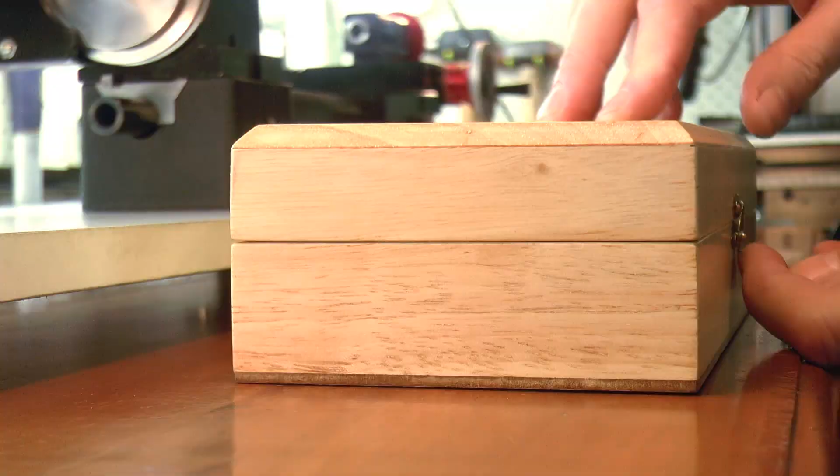A number of requests over the last few years have centred around how to go about setting up a home machine shop. What are the essential tools to buy and in what order should they be purchased? Well, it's a very big subject and I think it's fair to say that everyone is going to approach this differently. So take what I'm about to say as a sort of rough guide, but don't hesitate for a second to adapt it to suit your own situation.

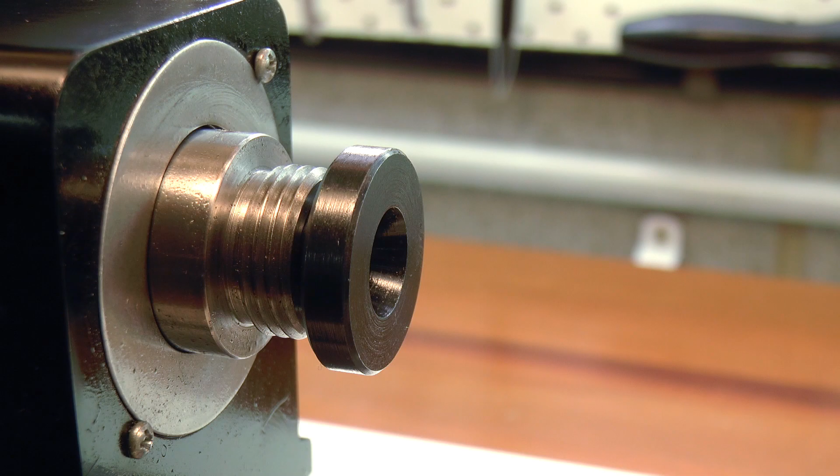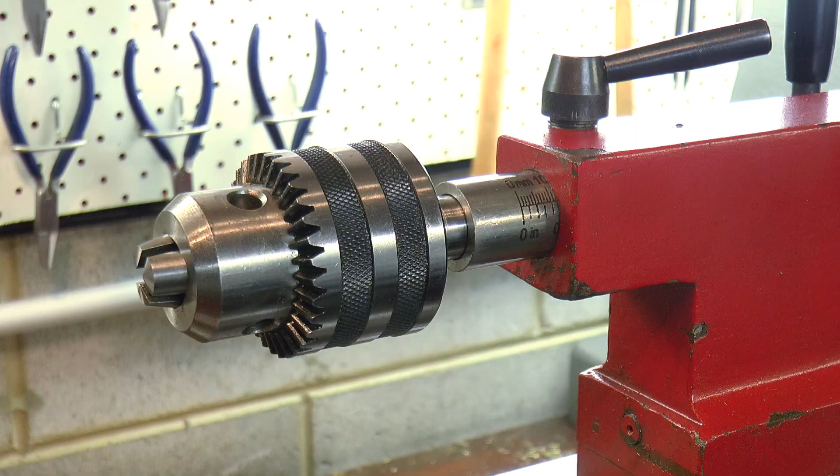Okay, so before we start, here's a quick overview of my shop. I have 4 basic machine tools that I consider to be the core of the shop. That's the lathe, the mill, the horizontal bandsaw and the bench grinder. Now there are a number of accessories required to make both the lathe and the mill usable. And there's a small amount of essential metrology and marking out gear required, stuff that every shop needs to have as a bare minimum.

There's a collection of what I'd broadly describe as the essential hand tools. And finally, something I don't often mention is the library of magazines and books that I've built up, which I also consider to be an essential part of the shop. Now on the periphery of this shop core are all of the nice to have tools that without a doubt make life in the shop not only easier, but also a lot more fun. For now though, I'm excluding those tools and keeping the discussion to just the essentials.

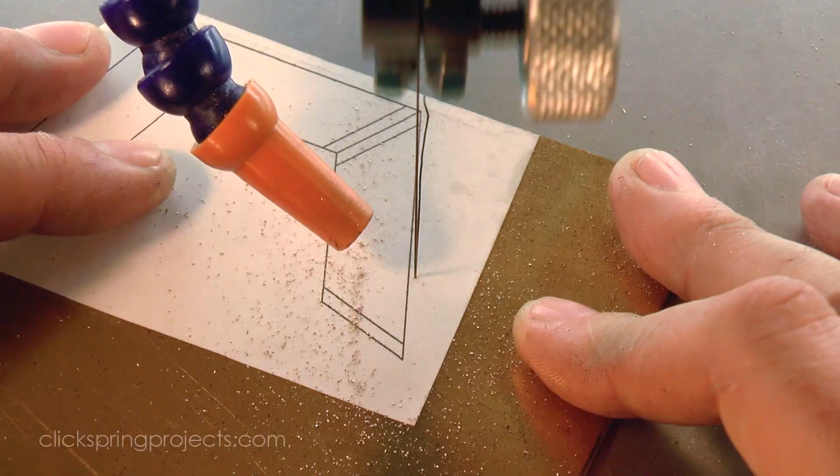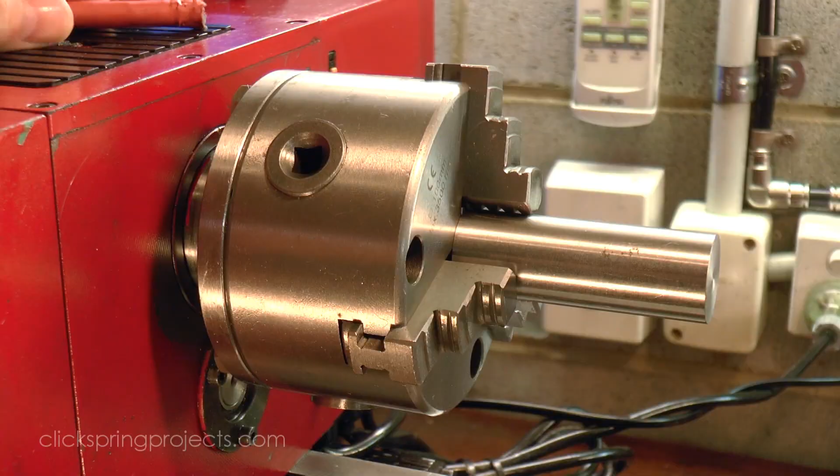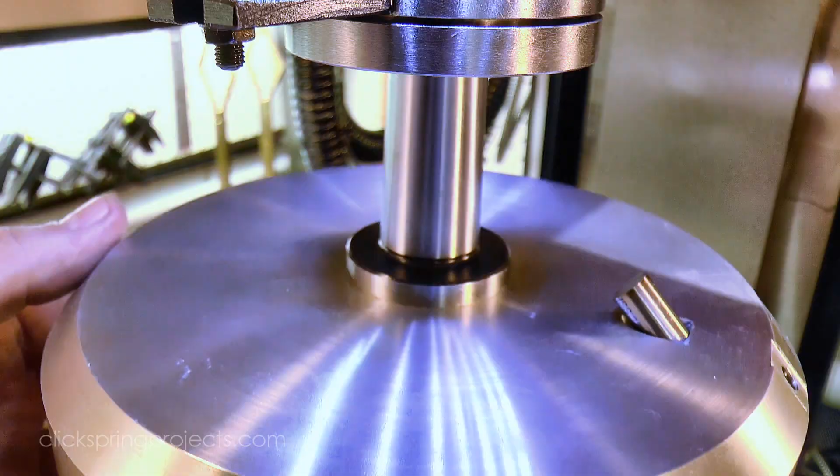The other tools are certainly worth considering at some point, but they can definitely wait until you've locked down the rest. Because the strategy I recommend is to start small and then build the shop in discrete stages. Get the key machine tools and the bare minimum accessories to be productive, and then slowly accumulate the rest of the shop over time in response to the projects that you take on. So in effect, the projects themselves become the driver behind future tool purchases. And importantly, also the driver for the tools that you choose to make for yourself.

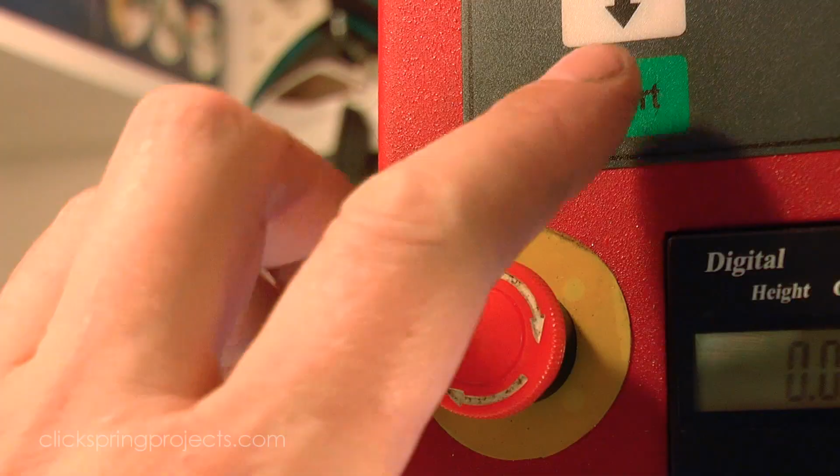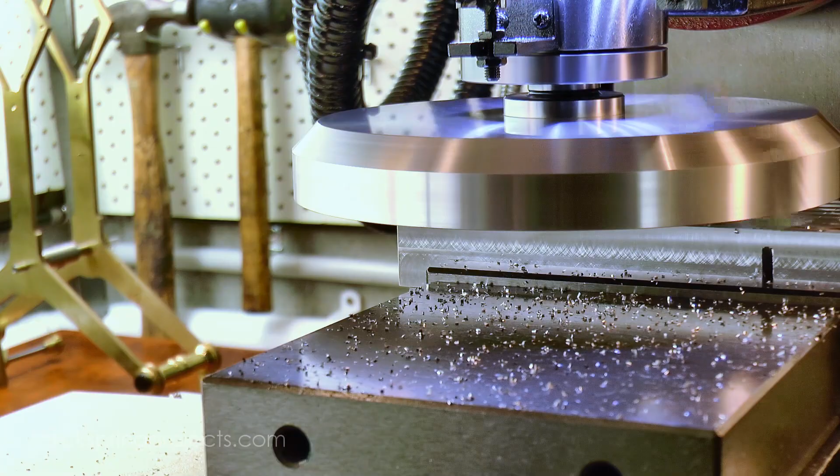Because as the shop develops and grows, you'll become increasingly independent of the tool retailers and further able to bootstrap the shop development using what you already have. You can make something like, for example, this large fly cutter that exactly suits your needs that simply isn't available for purchase anywhere else. That tool gets used along with everything else to make more tools, and on it goes until you've got the shop equipped exactly the way that you want it.

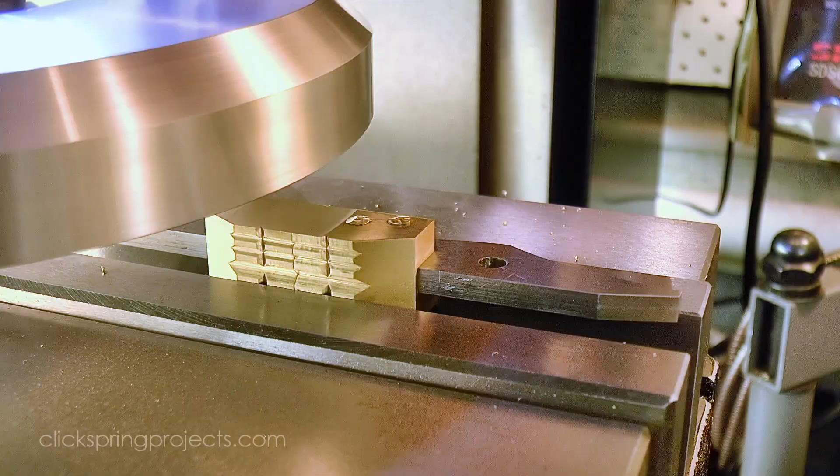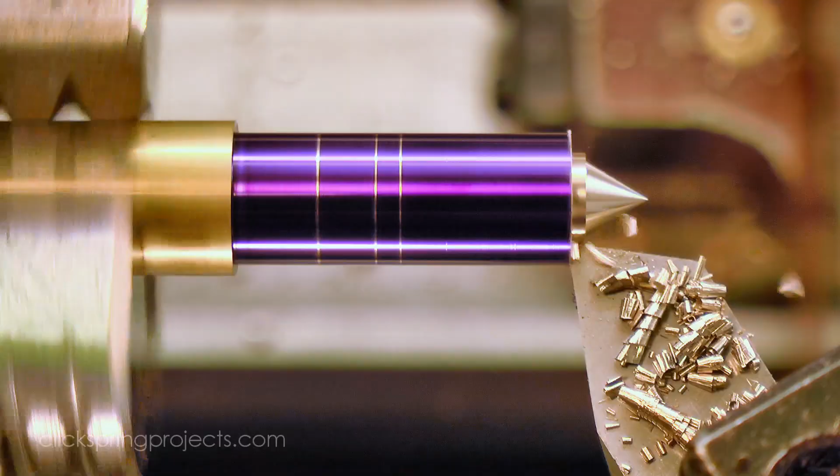Okay, so where's a good place to start? Well, no matter what you choose to make in a shop, a large proportion of your time is going to be spent making parts with turned features. So unless you've got a really good reason to go with a mill first, a lathe is almost certainly going to be the logical first purchase. Now, which lathe in particular is itself a huge topic, and I'm going to cover that in detail in the next TGT. But no matter which lathe you decide on, you'll need at least a few extras before you can start to get the very best out of it.

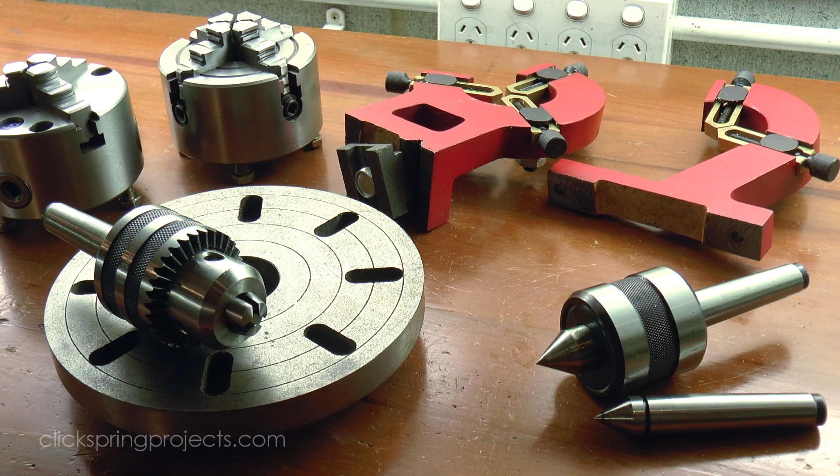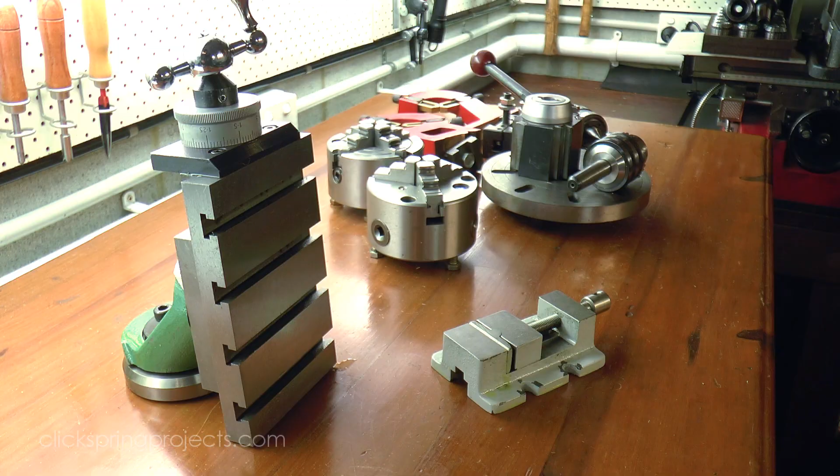Most lathes come with a 3 and 4 jaw chuck, a follow and steady rest and a faceplate. But you'll also want to immediately consider a drill chuck, a live and dead centre and a quick change tool post. If a mill is still outside the budget for the foreseeable future, then maybe also consider a vertical slide and vise so that you can take care of some of the small milling jobs on the lathe cross slide. And of course, you'll also need some lathe tools.

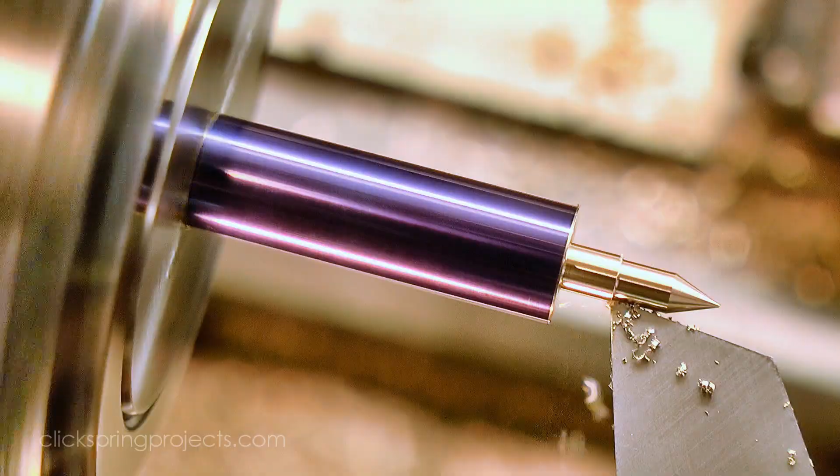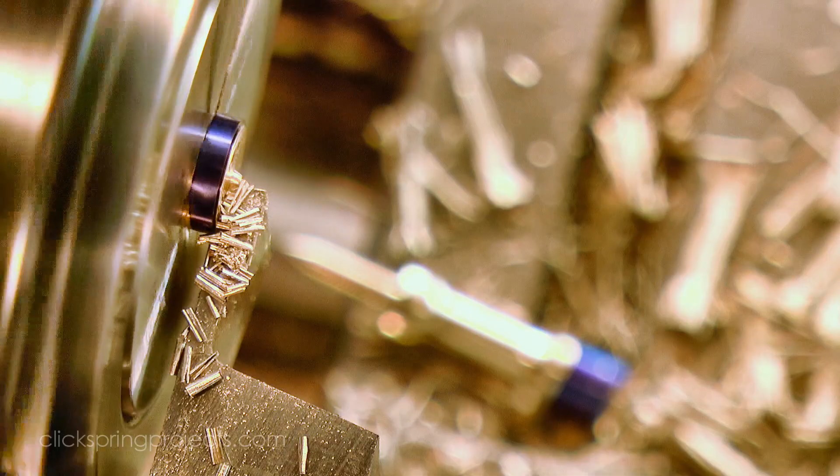Now, as you've probably noticed, I use high-speed steel and shop-hardened carbon steel almost exclusively for my lathe tools. I do use insert tooling from time to time when I really need it, but by and large I find high-speed steel and carbon steel to be more versatile. I can fully customise the tool to any required shape, and I find it better suited to the scale of work that I do. But of course that means the shop needs tool number 2, a bench grinder. Generally, they're not overly expensive and usually come with a fine and coarse wheel already installed.

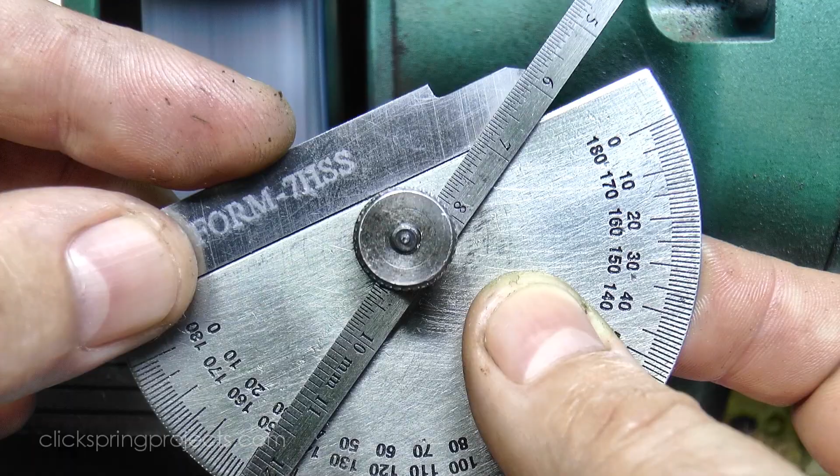The high-speed steel blanks can be bought from most tool suppliers, and there's a number of excellent videos on YouTube showing how to freehand grind lathe tools.

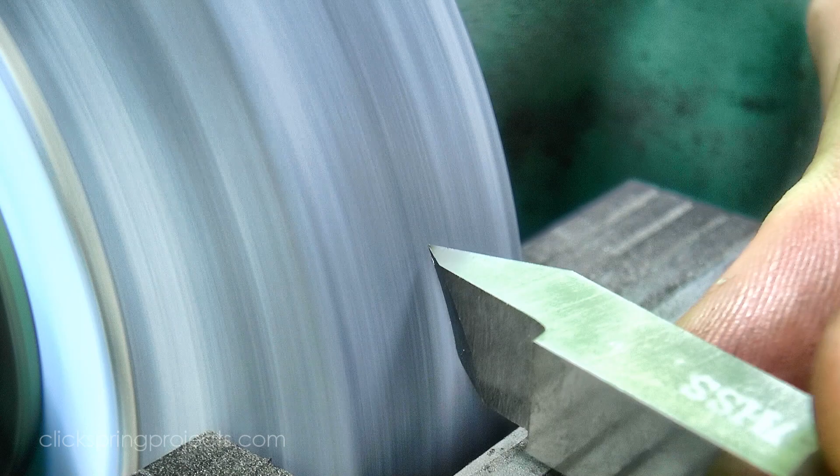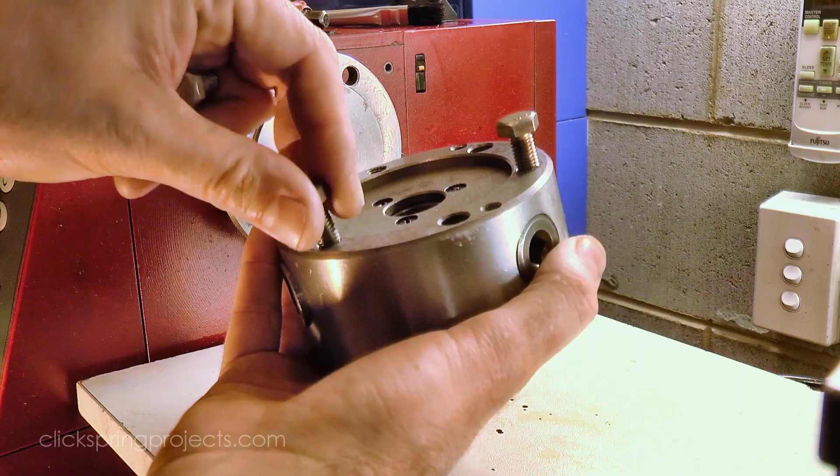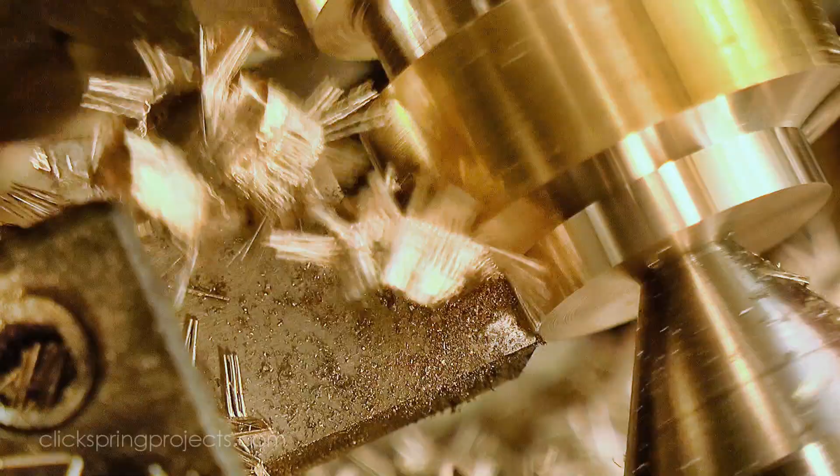One thing this tool requires though is a second isolated area away from the main shop to ensure that the grinding dust doesn't drift onto the lathe bed. Now, it doesn't need to be anywhere special, just so long as it's not inside the actual shop. Okay, so at this point you're off and running and you've got your own machine shop. And if you've hit the budget limit, then the shop can stay at this first stage indefinitely, without issue. You can start making some of the tools that you'll need, like drawbars, chuck keys and so on, have some fun and slowly accumulate some more of the accessories over time.

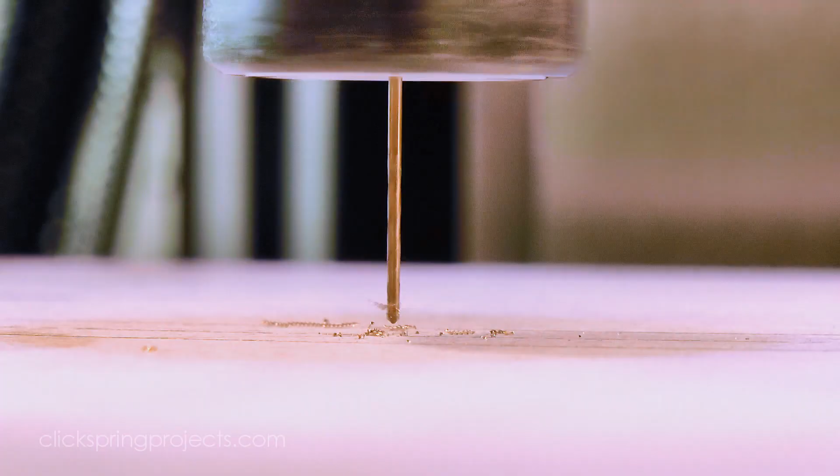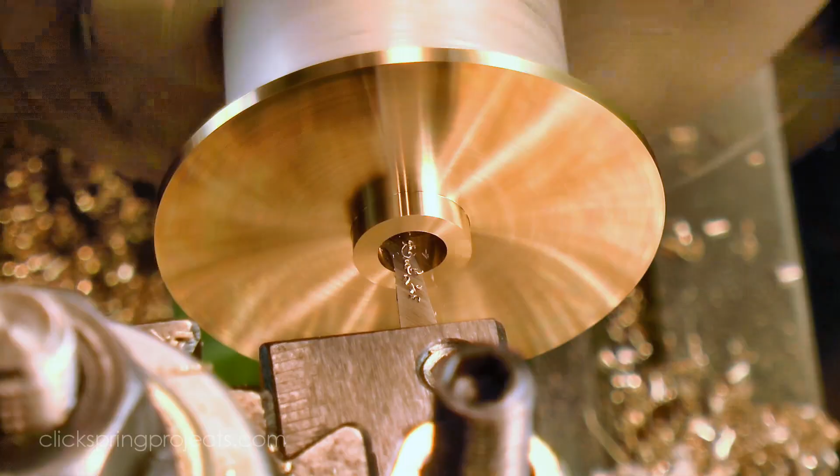But one interesting thing about machining is that while a lot of time is spent forming profiles, it's also largely about making holes, and lots of them. Some small, some large, some tapped, and almost all of them required to be exactly where you need them to be. Now, to some extent, these holes can be formed on a lathe, but when the budget permits, eventually you're going to want to think about getting either a drill press or, I think, the better option of one of the benchtop mill drills.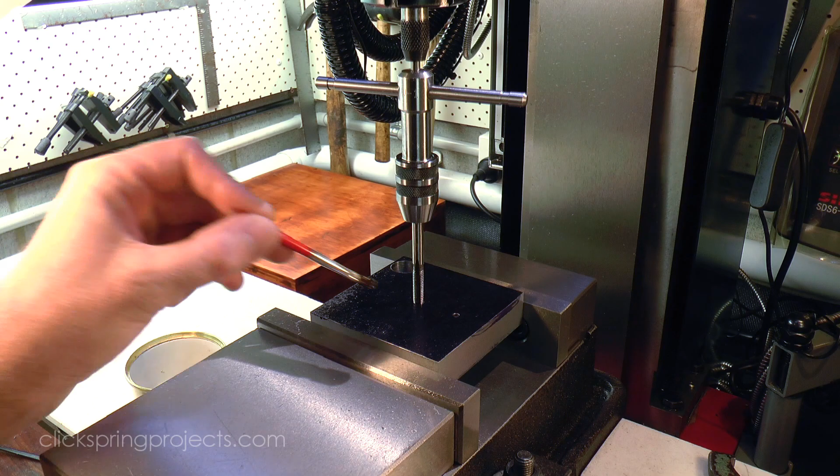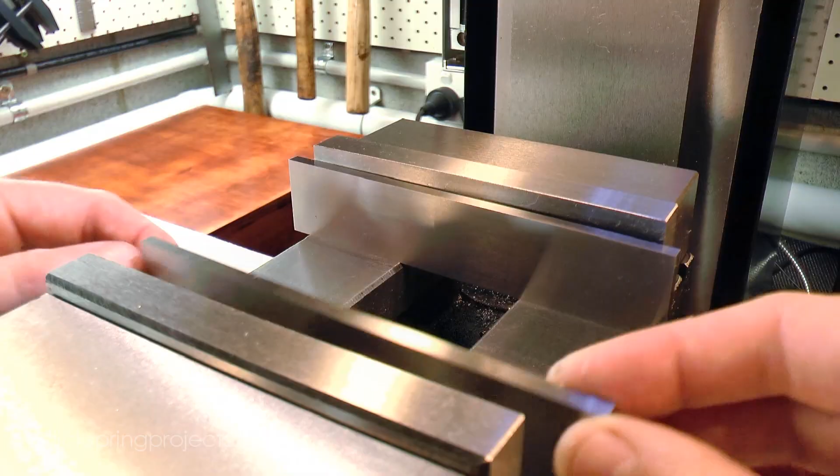Now again, selecting one is a big subject, and I'll cover it in detail in a separate video. But much like a lathe, no matter which one you choose, there's a couple of extra bits and pieces you'll need to consider to make it useful. The machines tend to come with a basic clamping kit and a drill chuck. But you'll immediately want to consider a decent vise, some parallels, an edge finder and wiggler, and some way to securely hold the cutting tools.

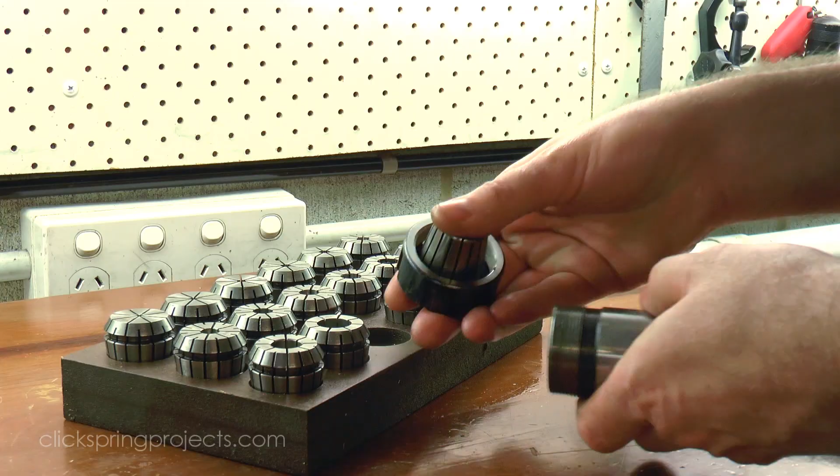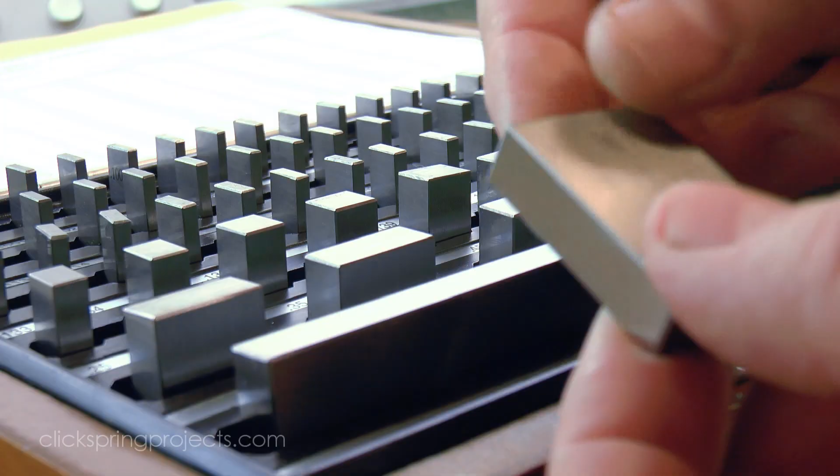I use ER32 collets in a collet chuck, and I selected a number 3 Morse taper for both my mill and the lathe spindles, so that the collet chuck would be interchangeable between both machines. That way I could use the one set of collets across the shop. Now things like gauge blocks, sine bars and the various setup blocks are all nice to have, but don't hurry to get those just yet, they're not that urgent. Wait for them to come up on special or second hand and get a better deal.

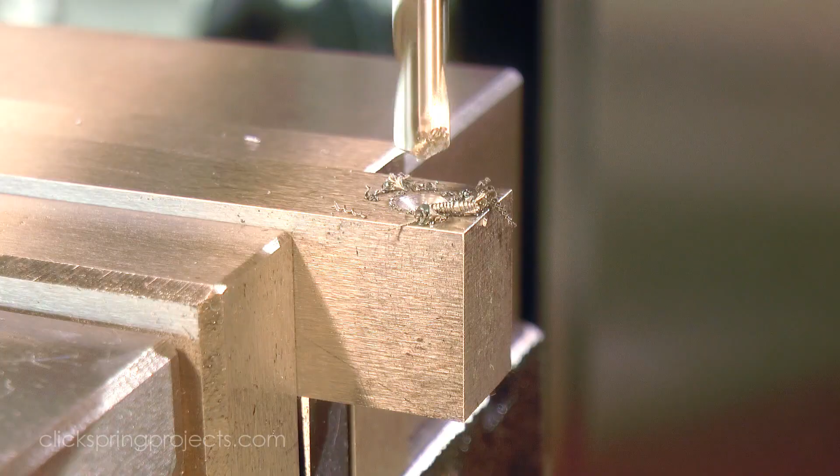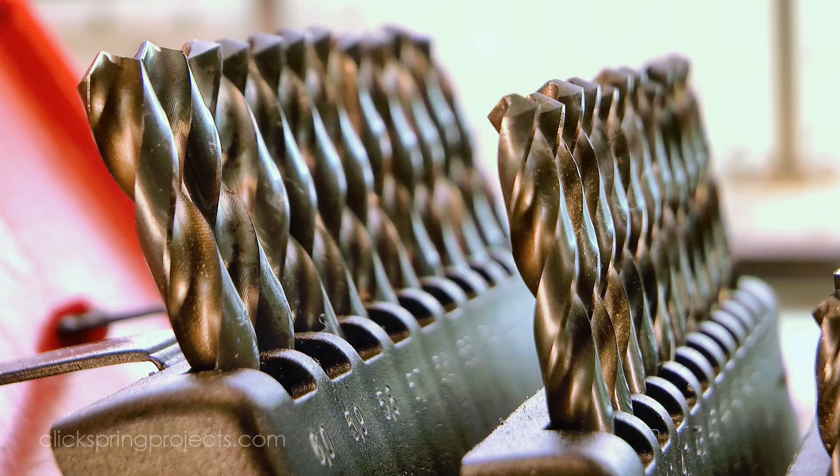But you will need to get some cutting tools right away, and this point is worth emphasising. With cutting tools, you definitely get what you pay for. So whenever the budget allows, be sure to buy only professional grade cutting tools. Basically the same brands that your local machine shop would use. A good quality set of small increment high speed steel drill bits like this, and a small selection of end mills will be enough to get you started.

And then buy only the pro stuff individually as the projects call for them. It will be more expensive than the lower grade box sets that you can find online. But over time, you'll accumulate a quality set of cutting tools that'll not only last longer, but also bring out the best in your machines.

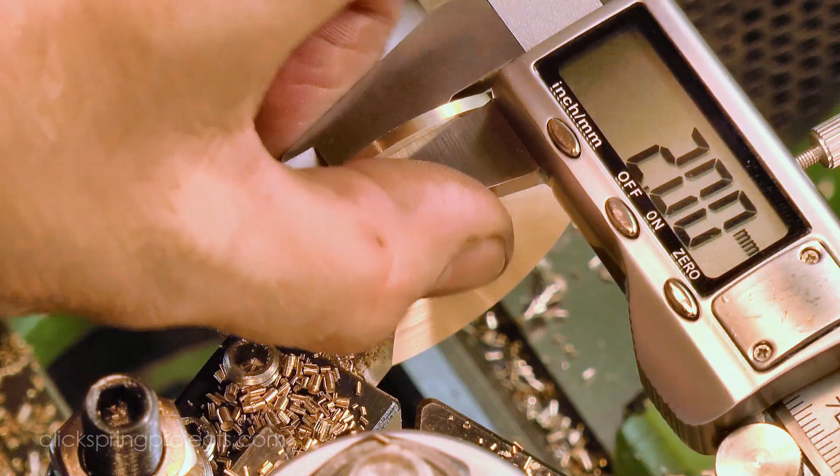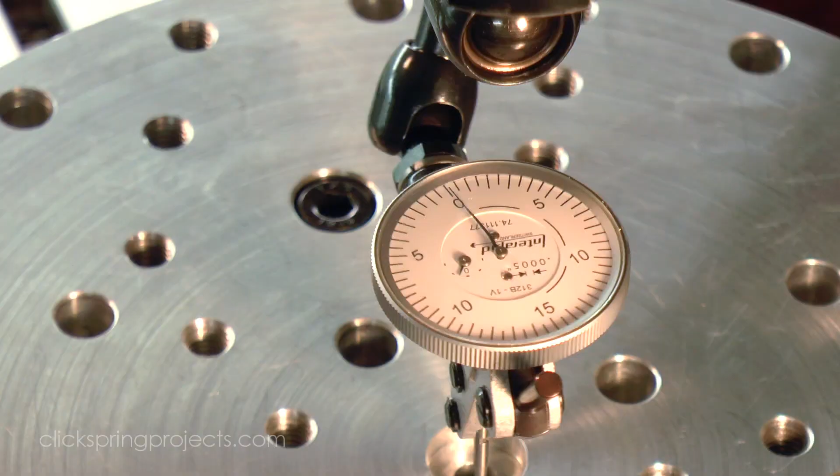Okay, now you're really humming along, and you can take on a huge range of projects in your ever-expanding shop. But of course, you need to be able to mark out and measure what you're doing. So you'll need to consider a 1-inch range micrometer, calipers, a dial indicator, and also a dial test indicator. Now the brand name versions of these are definitely superior, but they are expensive. So hold out for a good sale price and be on the lookout for good second-hand deals too.

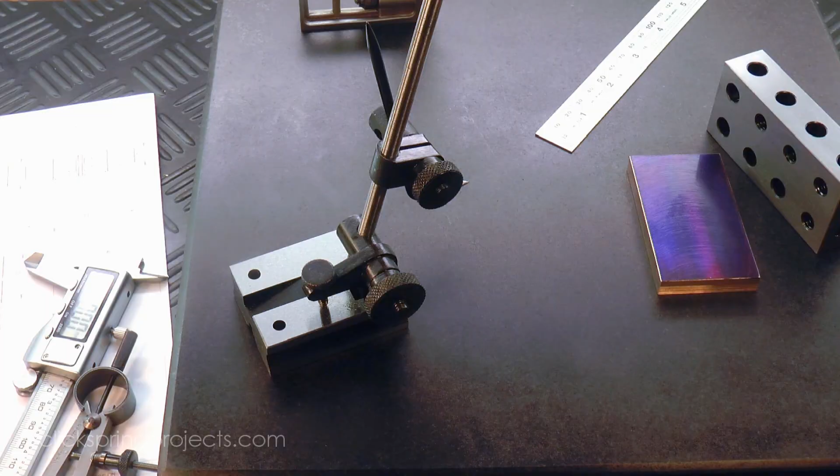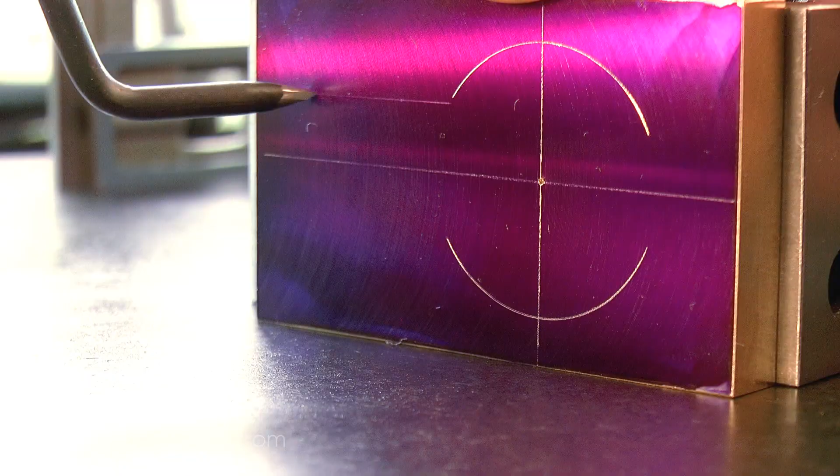A quality reference surface will be required at some point. And a digital height gauge would be nice to have, but it can probably wait. In fact, I still haven't got around to getting one. Instead, I use this old school height gauge on a surface plate along with a square, straight edge and dividers, and it's rare that I hit any problems.

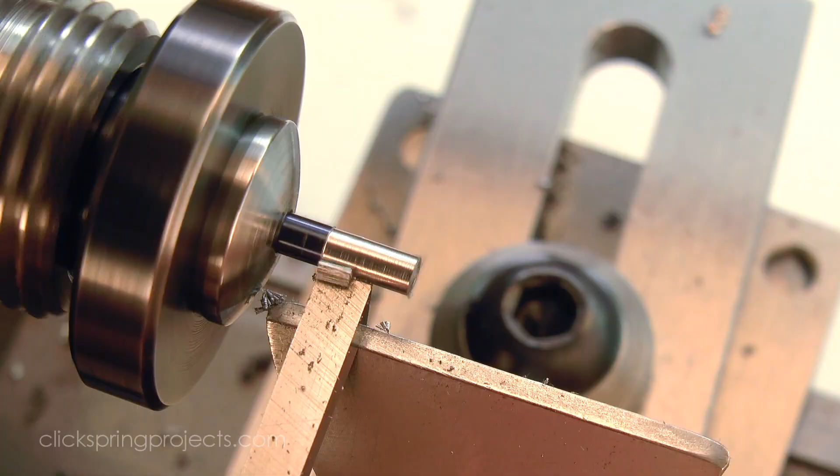Now hand tools are going to be specific to the sort of work that you want to do, and of course a lot of them can be shop made. But for the more general tools, most of what I have is the cheaper grade, and I'd say quite okay to get the job done.

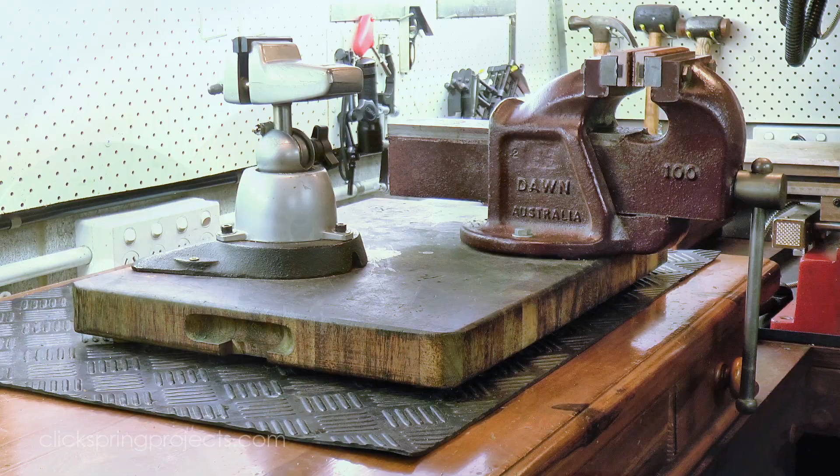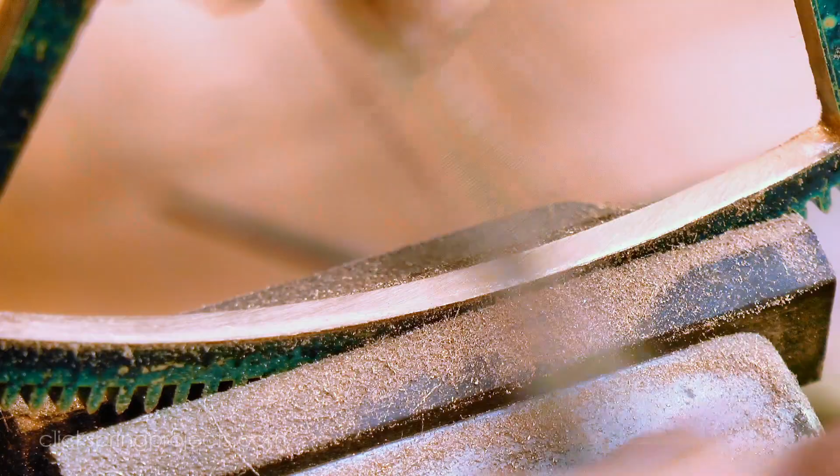A bench vise is a must at some point, and if you happen to be setting up for clockmaking, then eventually you're going to need a range of needle files and abrasive stones. Much like the cutting tools, avoid the cheap stuff. Be sure to buy only Swiss-made Grobet files and Norton abrasive stones. You won't need a full range all at once, so a small selection of stones and cut 2 files will do for the start, and the rest can be accumulated over time.

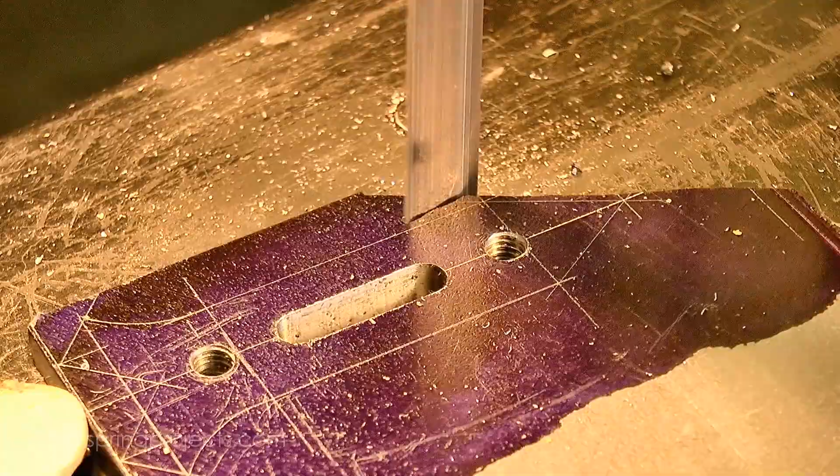And finally, there's one more machine tool to consider for the initial setup. It's probably the first step beyond the essential list, but using a hacksaw to cut off raw stock gets tired really quickly, especially in the heat of summer. So if there's any way you can swing it within the budget, then be sure to get a horizontal bandsaw. It cuts down the stock preparation time enormously, and it can also work in the upright position, so it's sort of a cheap upright bandsaw too, with a few limitations.

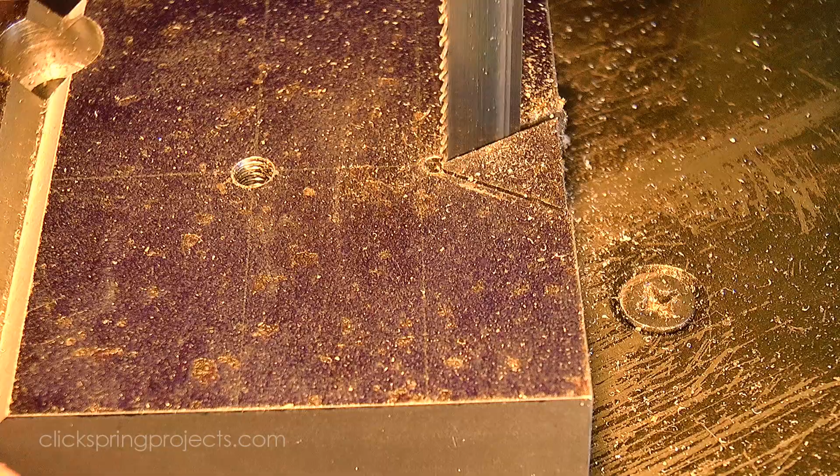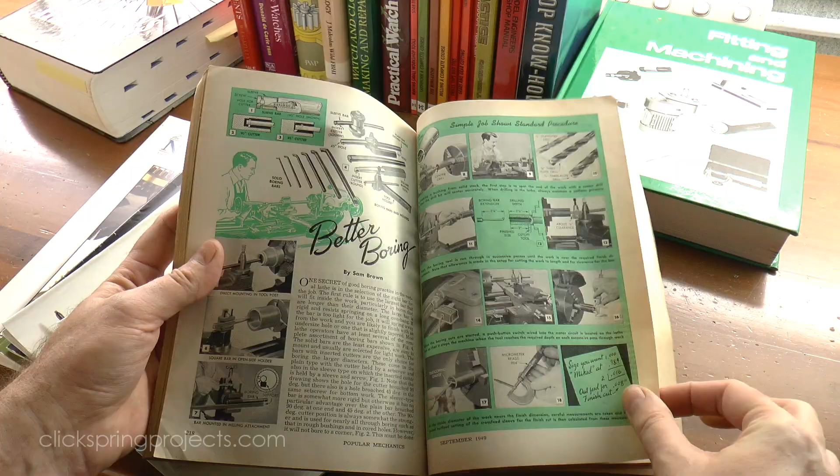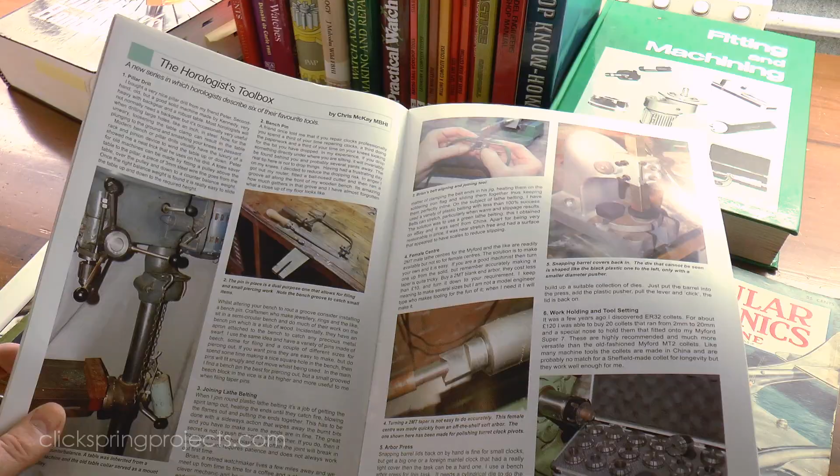Okay, now I mentioned books and magazines at the start of the video, and even though I've left it to the end to talk about them, they're probably the most important first purchase of all, because it's knowledge that lets us bring out the best in our tools. I watch a lot of YouTube videos to learn new techniques, and the internet is truly a great resource, no doubt about it. But it's from books and magazines like these that I get a really deep understanding of how and why things are done the way they are.

Now, Machinery's Handbook is a given, but if you're looking for a really accessible introduction to some of the more technical subjects, then I definitely recommend the Workshop Practice series of books. Just select the topics about which you'd like to learn more, and you can build up a really good reference library tailored to your specific shop interests.

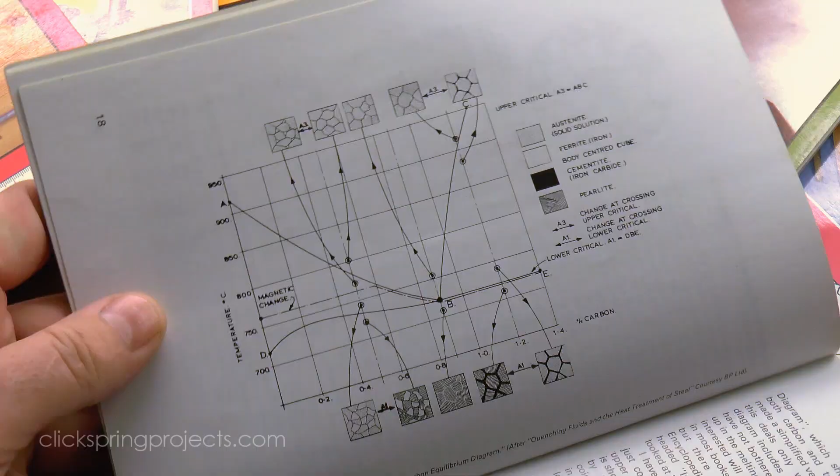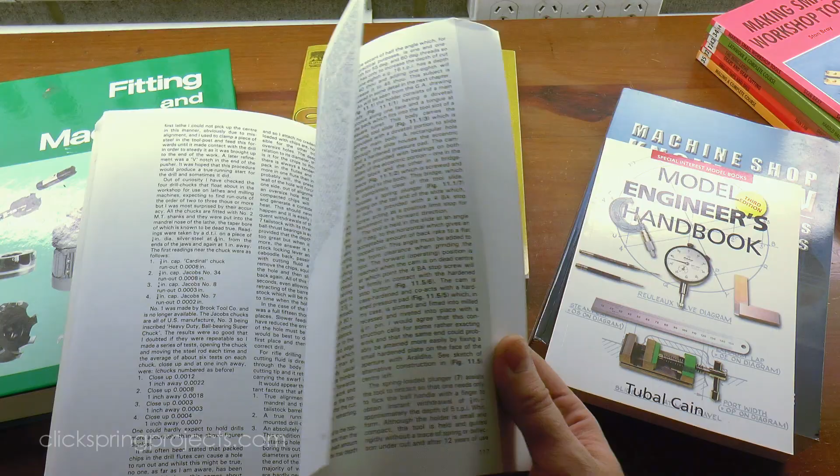There's also the classic model engineering texts from the greats like George Thomas and the English Tubal-Cain. All full of hard-won experience and knowledge, and brimming with terrific project ideas to get you started. And if you're into clockmaking, then no clock workshop is complete without these essential books on horology.

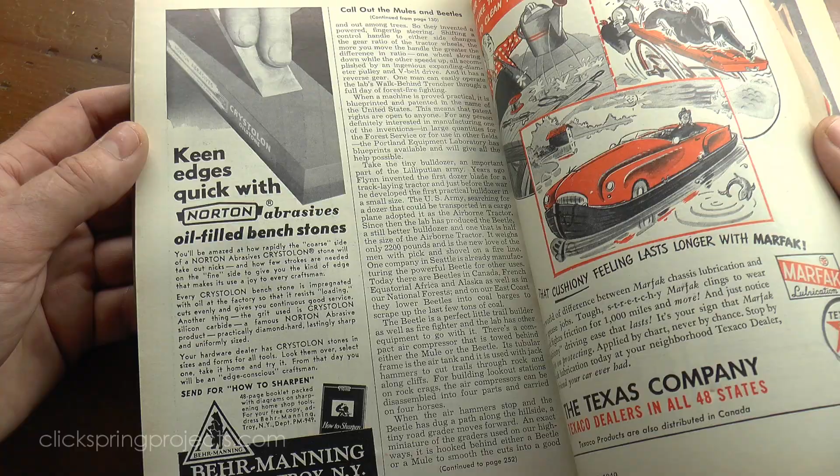And I think that nicely rounds out the shop setup. With this small library and the initial tools that I've just covered, you've got the core of a decent home machine shop in place. It won't have cost you an arm and a leg, and you can continue to build on it as time and dollars permit. Now, as I said at the start, everyone's approach to this will be different.